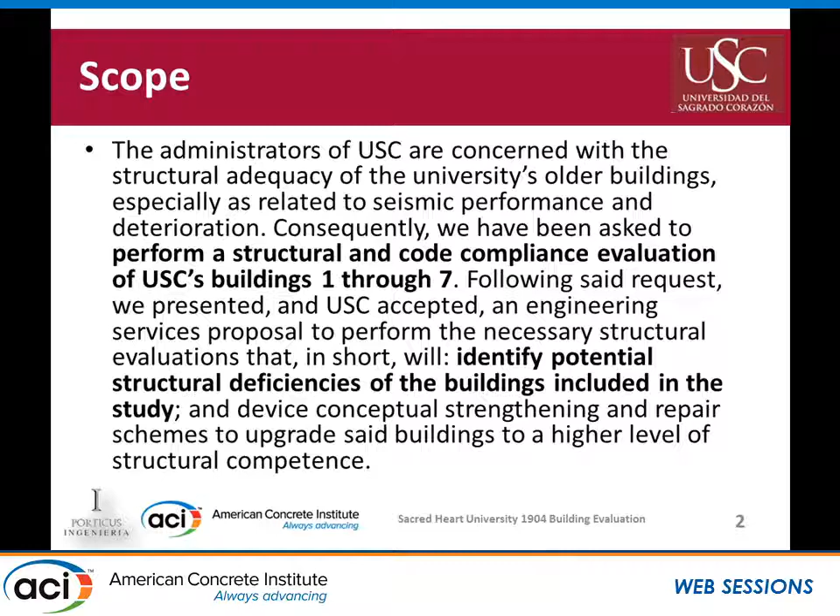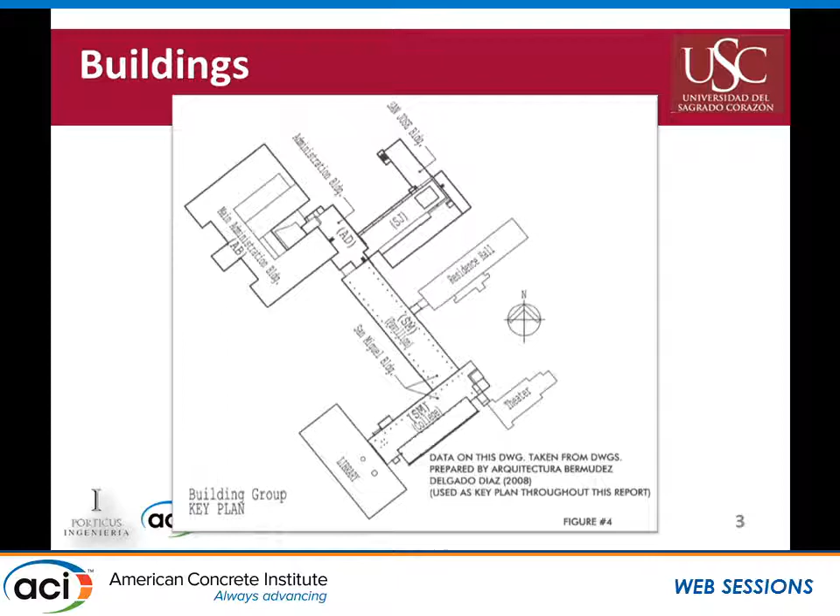Do we have... oh yes, pointer. This is the 1904 building, and it has several expansions. We'll talk about it. But they asked us, since we were going to do this, to do the same kind of study on other buildings, the San Jose building, San Miguel building, the residence hall, etc., which are concrete buildings that were built over the 20th century, attached somehow to the original 1904 building. There are no joints whatsoever between any of the buildings, so you can imagine how difficult things get.

We discussed with them, and they allowed us to do the preliminary evaluation. As you know, you review construction drawings, do visual inspection of the buildings, then some quantitative comparison of codes. As you go back to the old buildings, you'd say, well, it will be more difficult. As you go to the newer buildings, you'll have more information. Wrong answer. The newer buildings, the less information we had.

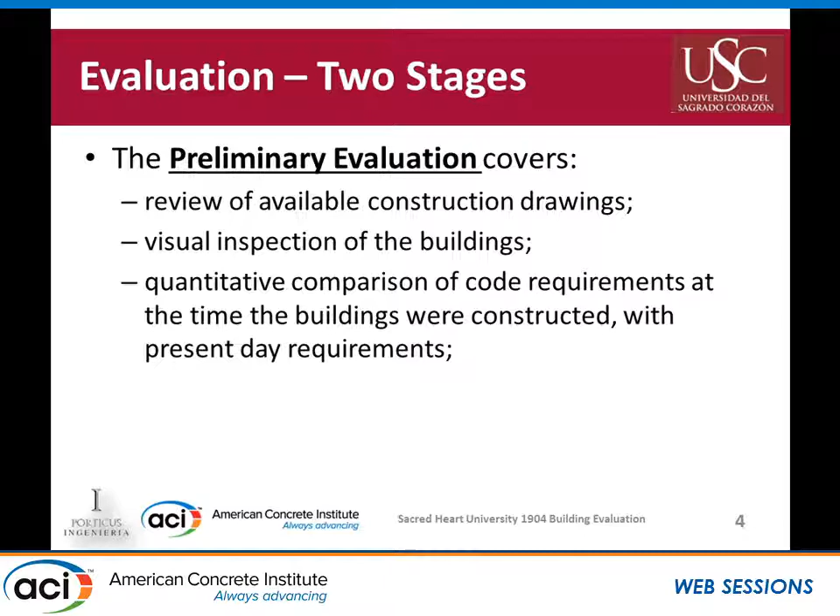We were able to find the construction plans for the 1904 building. Some of the buildings were done in the 70s and 80s, and nobody has an idea where the plans were or what they did. So there was a program for us to do an as-built of the building. We did both the architectural as-built and the structural aspect, because there was no idea what the structural systems were. So it was a tough start.

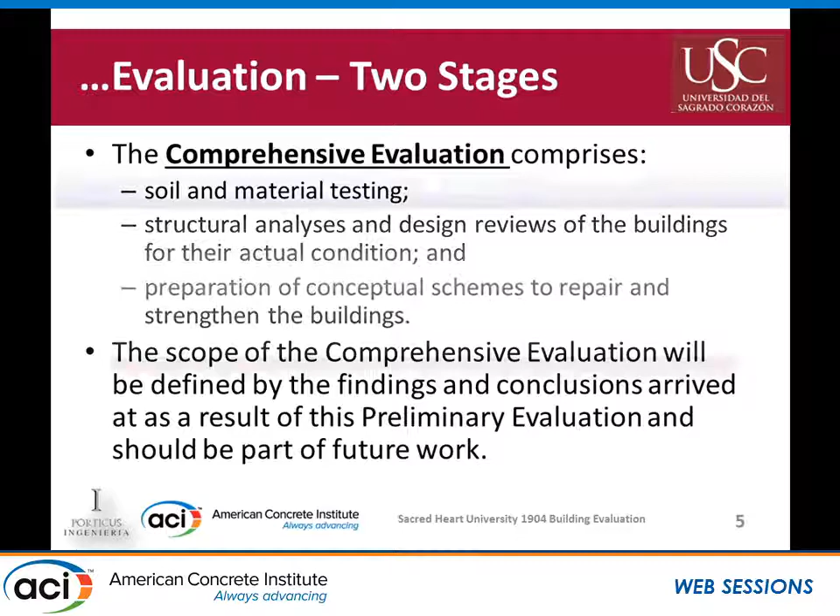Then the comprehensive evaluation, as you know, goes to soil and material testing, some analysis, and the preparation, guided by what we found in the preliminary evaluation. Because there are seven buildings, in terms of what the university thinks there are, 7 buildings, it would be too long for the short 25 minutes I have.

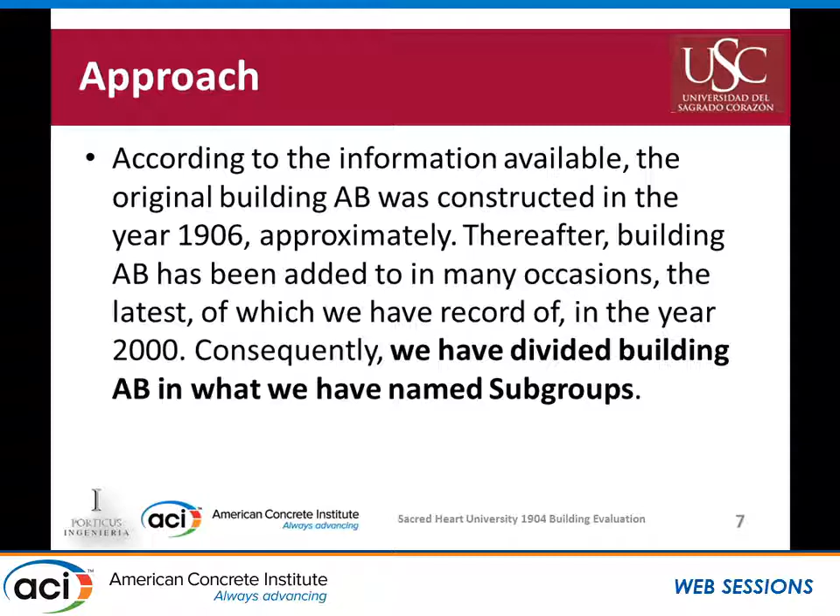So I'll concentrate on the main building, the 1904 — 1906, I'm sorry — that's the presentation. That building has had several additions up to the year 2000, which was the last addition. So in order to perform a Tier 1 or Tier 2 analysis, we had to subdivide the building into what we believe were the construction stages, because for some of them we're not even sure, after several months of studying. So we call them subgroups, and that's how we started the group.

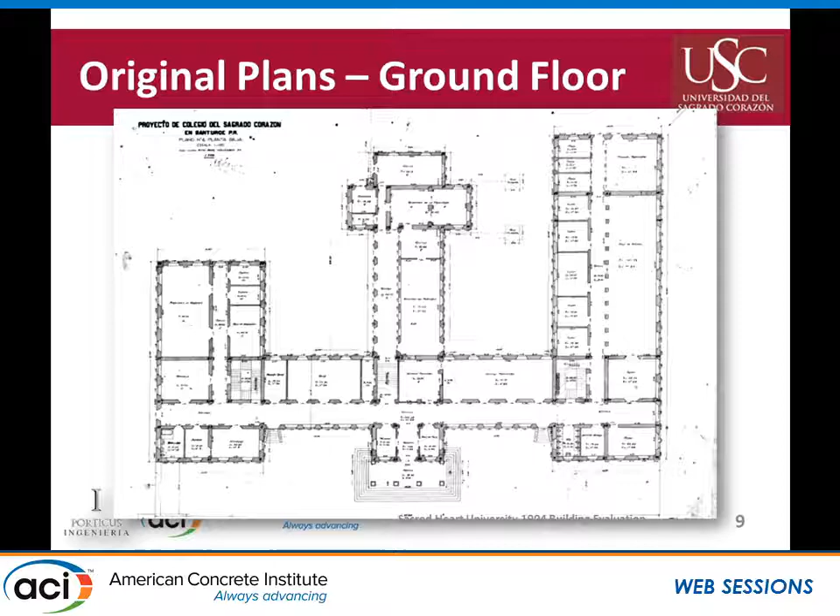They existed in the archives of the university. The original building was built with some concrete columns. There's a chapel—we'll go into that soon enough. The chapel's columns were made out of concrete, but instead of rebar, they have steel shapes inside the columns. The floors were made out of steel beams, but the beams were encased in concrete.

I've seen that in several buildings in Puerto Rico from about 1910 to 1940. They would use steel shapes with forms that created a rigid diaphragm with rebar, but the steel beams would be inside the concrete. I'll show you some pictures later.

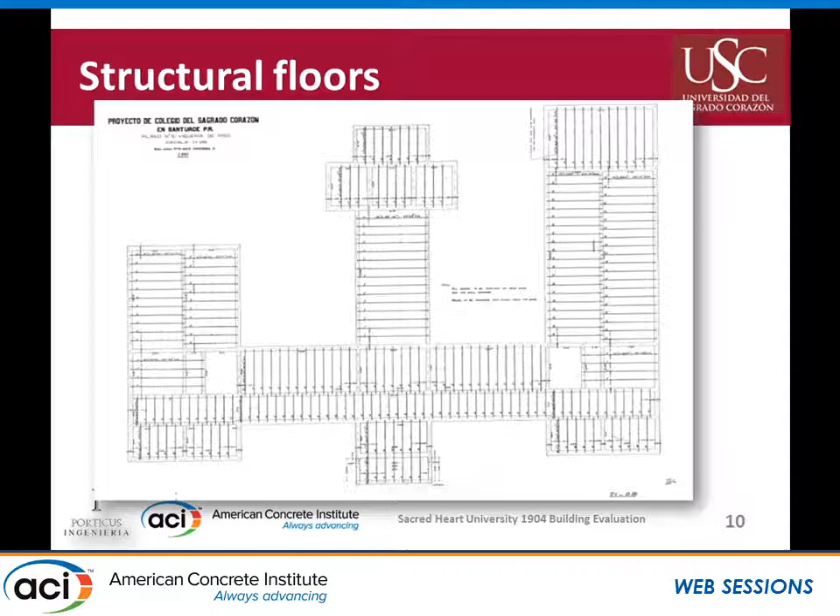It was a very simple design in those terms, but thank God for the original plans—we were able to have information on the original building. So we went into the trouble of trying to identify the phases of construction of the different subgroups.

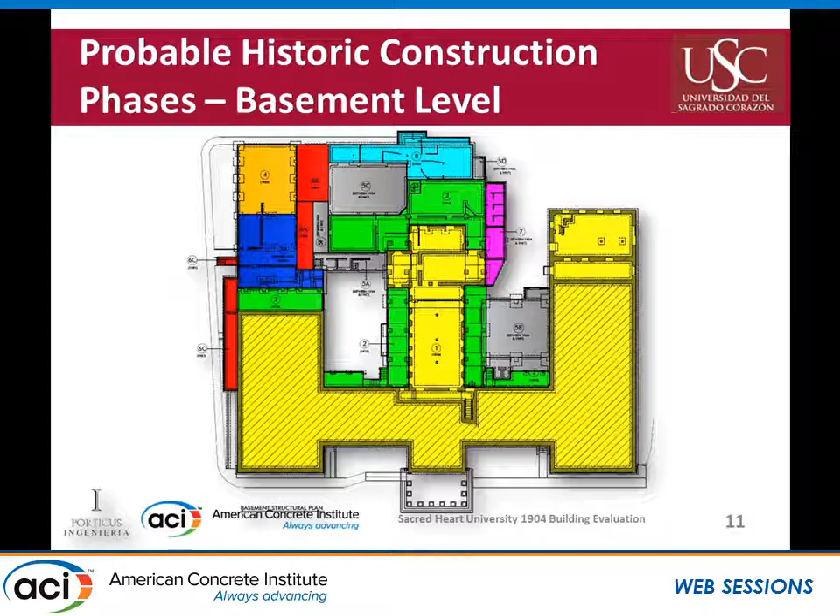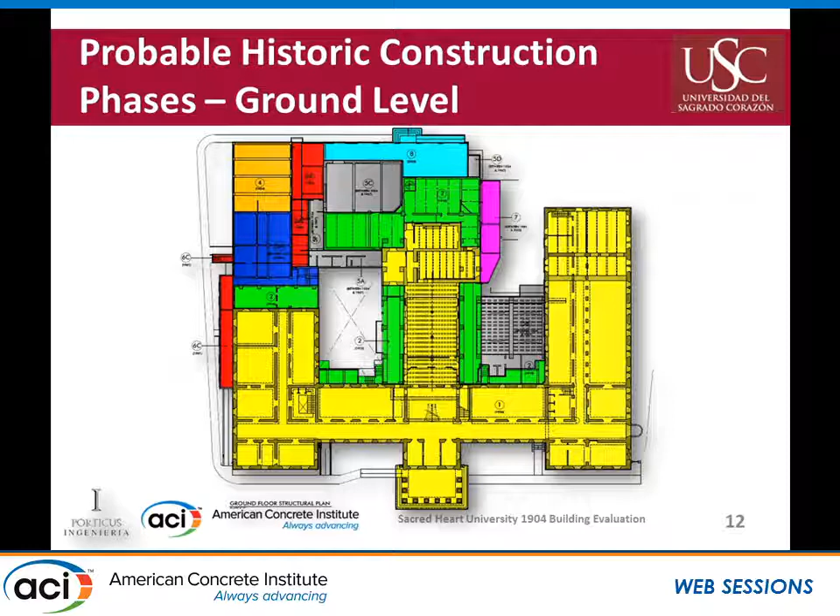As you go up, you can now see the chapel and what was built on top of it, and you can see the different buildings. The green building was the newest one. The areas marked as green are the ones attached to the main building, already reinforced concrete development. Only the area back here marked blue has steel beams and concrete floors.

As you go up, this is empty because this is a beautiful chapel, three levels high, with beautiful shelves. This is an addition, and this is one of the worst parts of the construction.

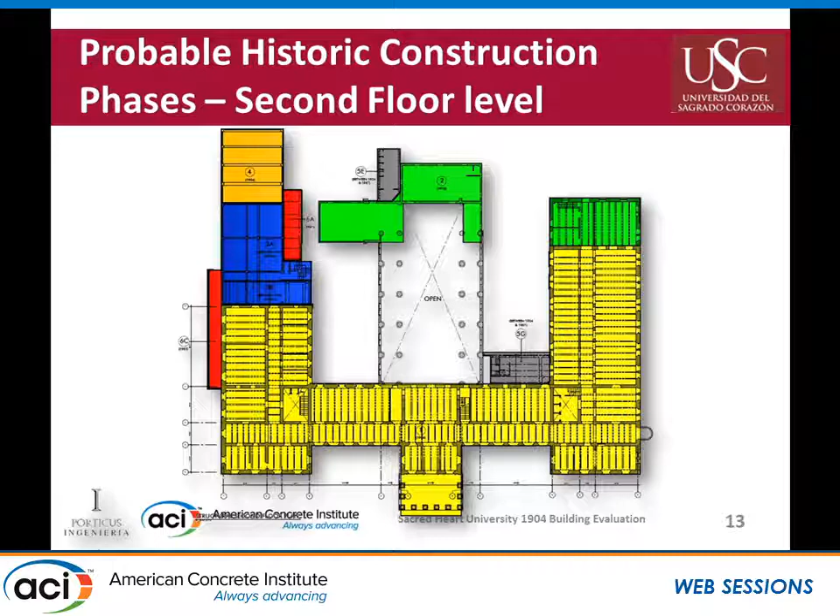This was an addition to improve the area for the priest, to have more room, plus some more rooms in the back and another library in the building. And then this is the roof of the chapel.

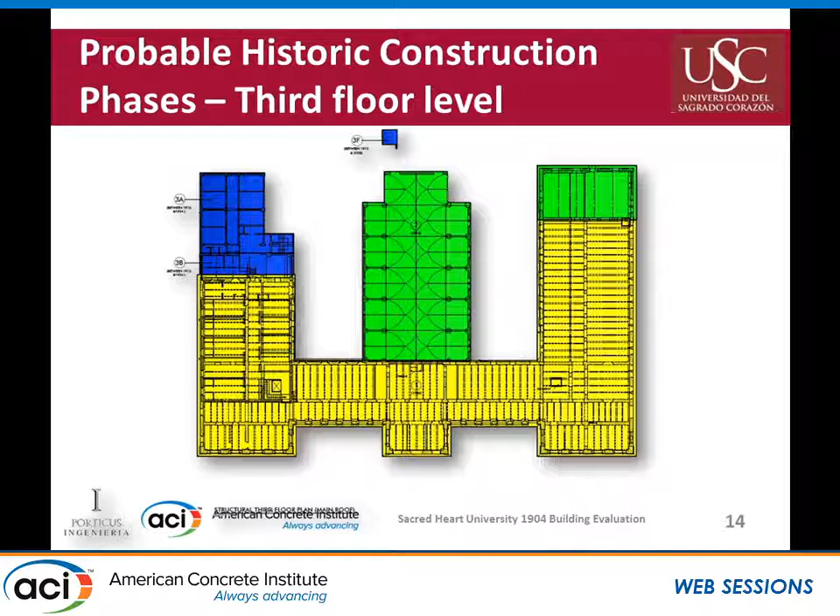Then some more—this was a college run by nuns for the first 60 years, so they built more rooms for more nuns. The same thing happened on the upper floor; what you saw from the front picture were more rooms for the nuns who ran the school.

It used to be a school for girls only until around 1980. Then it became a university. Today it is the Sacred Heart University of Puerto Rico.

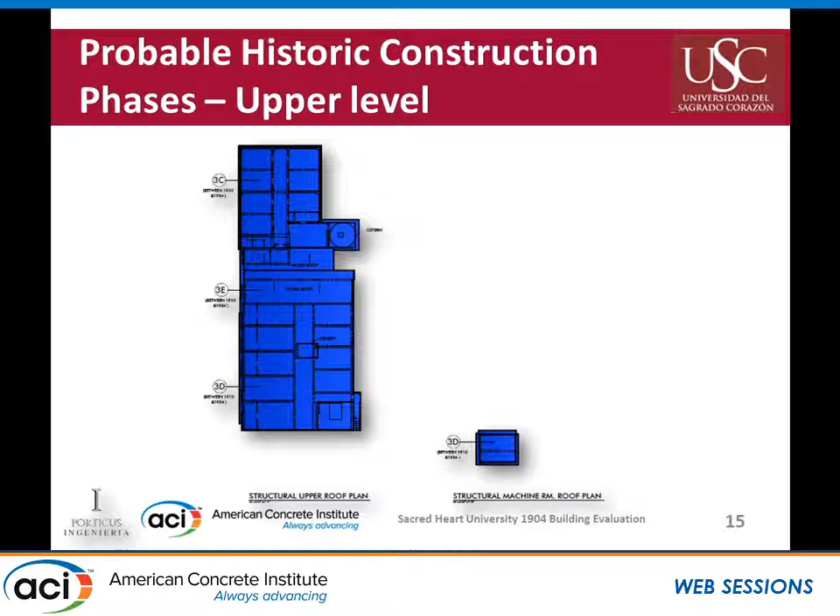This is one of the worst quality construction parts. It was apparently done without any construction plans—they would add some more rooms, and someone got there and just did them.

In terms of the rapid visual screening, as we went through the building, it was very difficult. We lost a lot of money on that first part because it is very hard to deal with the university, the professors, and the employees. This is the administration building, and because of different additions, the floor height is approximately 16 feet, but in many areas acoustical ceilings were installed during the different stages.

So in order to do a structural as-built, you have to coordinate when a room was accessible and when it was not. Because we were interested in the bigger job, we just hung in there looking forward to doing it, and we thought we could finish in two months. It took us six months to complete the structural as-built of the administration building alone, because of the coordination with the professors, etc.

As I always like, the FEMA form gives you a quick and simple way of seeing how bad things are. I know everyone can see every single number is there.

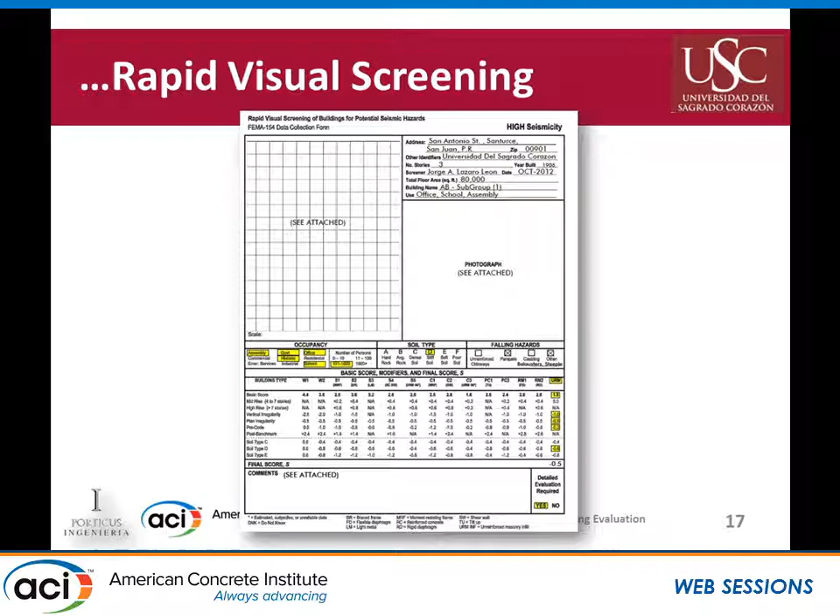This is the unreinforced masonry part. What you do basically is choose what applies or doesn't apply to your building. A basic score for unreinforced masonry is 1.8.

Everything below 2 points requires further studies. If your score by the visual screening is above 2, the building should be okay according to the process. But we started at 1.8, so we're already stuck there. In addition, we have vertical irregularity and plan irregularity.

It is a pre-code building, and we are on a stiff soil area. So our final tally is minus 0.5. It cries and shouts, 'Help me, help me!' That's the process. But things got worse because we thought, well, that's for the masonry building. We'll improve as we go on.

Nothing to do. So this is what we believe was the second construction stage of this complex: alleys to each side of the patio at the lower level of the chapel, additional rooms in the back, and the first lower level building on the lower floor.

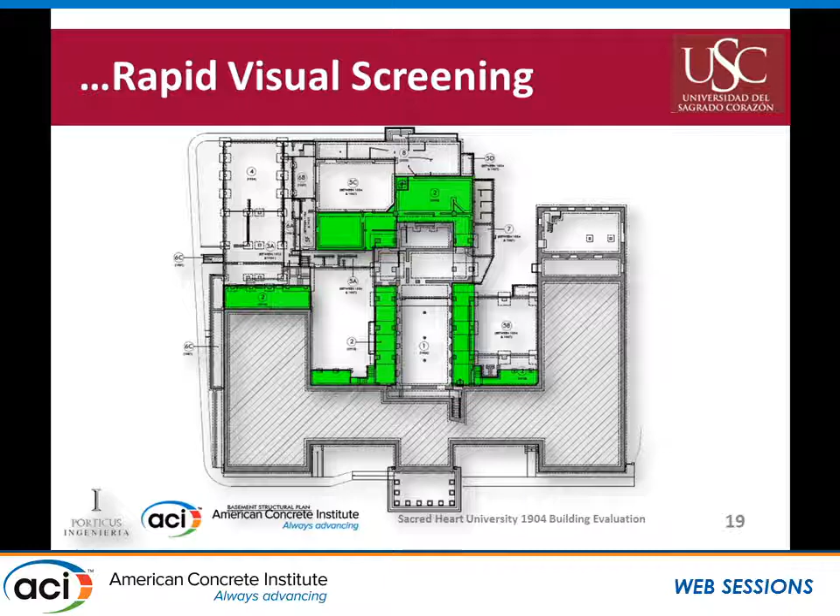But as we go, we did the same thing: minus 0.9, minus 0.3. You see two scores here, because this visual screening doesn't allow or doesn't take into account mixed systems. So we decided to evaluate both systems that the expansion has. That's why we choose reinforced concrete and why we use shear walls.

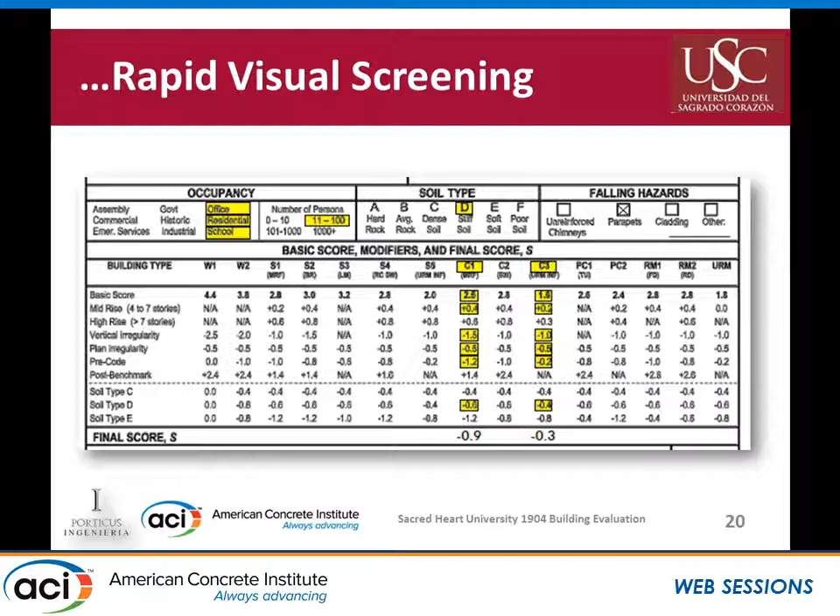As you see, it starts at 2.5, but as we go down there's a lot of negatives because, as you can see just by the plan, the irregularities are tremendous for what they did. So there's a lot of negative points in plan irregularity, vertical irregularity, pre-code, soil type, etc. Even the newer additions made in reinforced concrete both turn out to be on the negative side of the punctuation. So again, it was crying that you need some help.

So this is the process, and I cannot follow it large enough to do. But at the end, what this tells you - I'm not going to follow it due to time - but it's a very simple process. You go, when do you need what, or what do you need? I think it's a great guide.

I know there's some critics about this process that it takes too much out of the engineering judgment. I think that with good engineering judgment, this is a great tool, because lawyers exist. And at the end, some years from now, something is going to happen and I followed a process. I think there's a lot of logic and input. As ACI and ASCE now are working together improving these standards, it will be even much better, as we have gone in Committee 369 reviewing this stuff.

I understand the critics, but the worst thing is doing nothing. Three years ago I was invited to Turkey to give a presentation of U.S. codes and historic structures. It really makes you cry what poor guidance is actually given in all the codes in America in terms of what to do. The historic buildings are there, they are reality, and they are the patrimonial history of our country, and we need to preserve it.

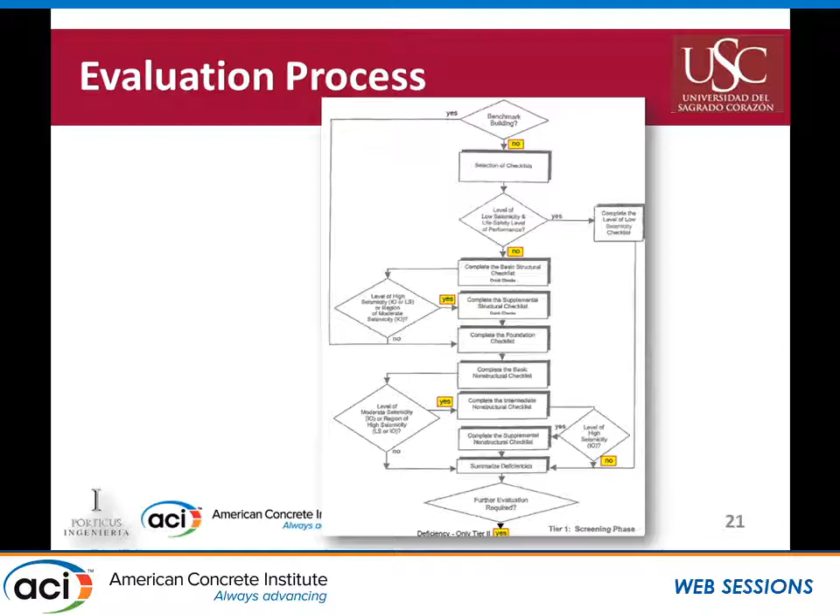So sorry for the guys who are always saying no. I think this is good. There's another federal evaluation requirement that you need to do in order to follow the process, and basically it goes again on whether it's a low, medium, or high seismicity area. In the case of Puerto Rico, it's a high seismic area.

Then this is a very important decision, whether you're talking about the building for just life safety or for immediate occupancy, which is very, very different in terms of the stricter requirements imposed on the structure. Most buildings will only require life safety - you want everyone to walk out after the earthquake strikes. But as you go into schools or hospital facilities, you really need to be in immediate occupancy mode, because they will be required after the damage.

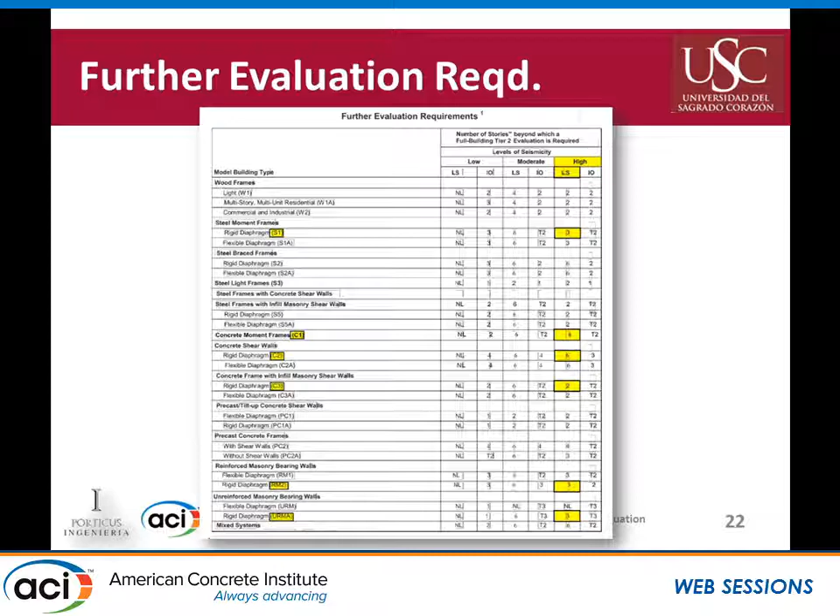So we go through a process. I'm not going through the numbers, but it's just a simple way of, depending what you have, you choose what the values are for your particular building. Then you try to see if there's some other deficiencies, in ASCE 31, the Tier 1 analysis, you determine depending on what is your system.

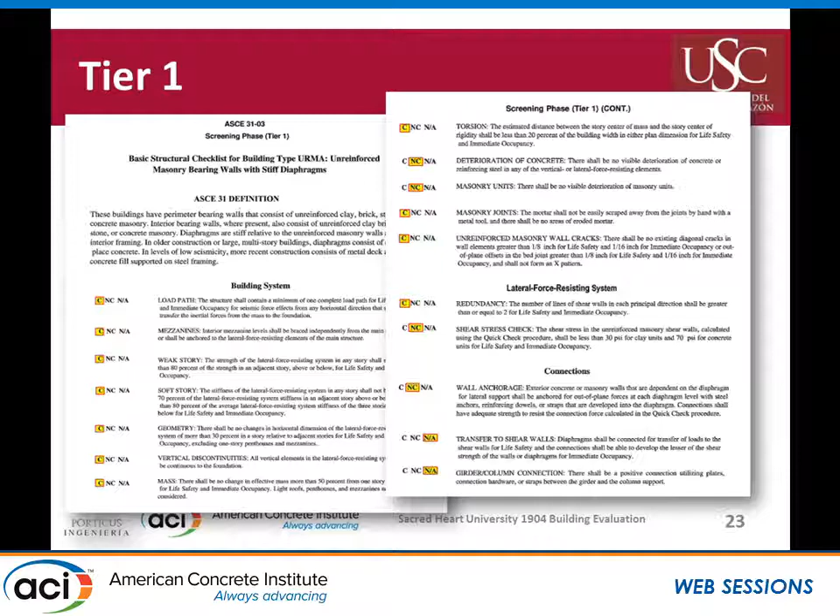Again, we're talking now about the 1904 building, and if it complies or not. There's a list, and you check whether it complies, doesn't comply, or whether that option is not applicable. There's a long list of things in terms of the building systems, the lateral force, the connections, etc. Then there are some supplemental structural checklists, because the building has so many deficiencies, you have to go to the next level and keep on looking for more deficiencies.

At the end, we found over 200 deficiencies in the building, according to the program. So although from this rapid visual screening you could determine that - just in case - remember, you have to convince an owner that there's a lot of money that has to be put into the building. In my opinion, I'm the one that sells the projects to the owners in my company. This is very important, because it's not just, well, we did a rapid visual screening and found your building is deficient and we need to do more studies and you need to pay me more.

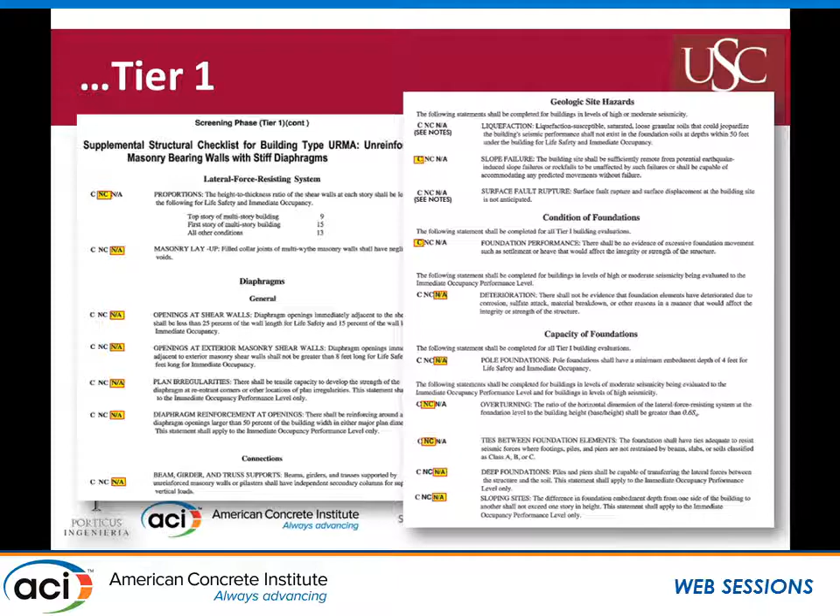But when you go with this checklist, say we went through the checklist that ASCE and FEMA have, and you find 200 deficiencies. Oh, that stuff's... that's a reality of life.

Just to show you some stuff, this is part of the rebar that got spalling, etc. But this is one of the craziest and worst parts we found all around the building. Every time a new air conditioner was installed or whatever, they did whatever they wanted. Nobody cared whatsoever in the maintenance division of the university. And they suck. There were even portions where there's already a hole here, but they make a new one next to it. Oh, there it is, you see?

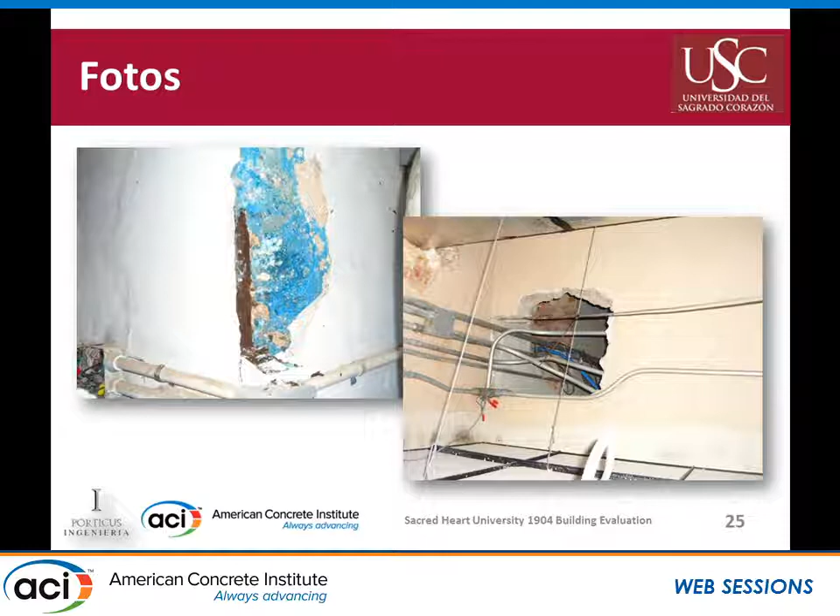So we thought architects were worse. No, the truth is that for structural engineers, mechanical engineers are the worst.

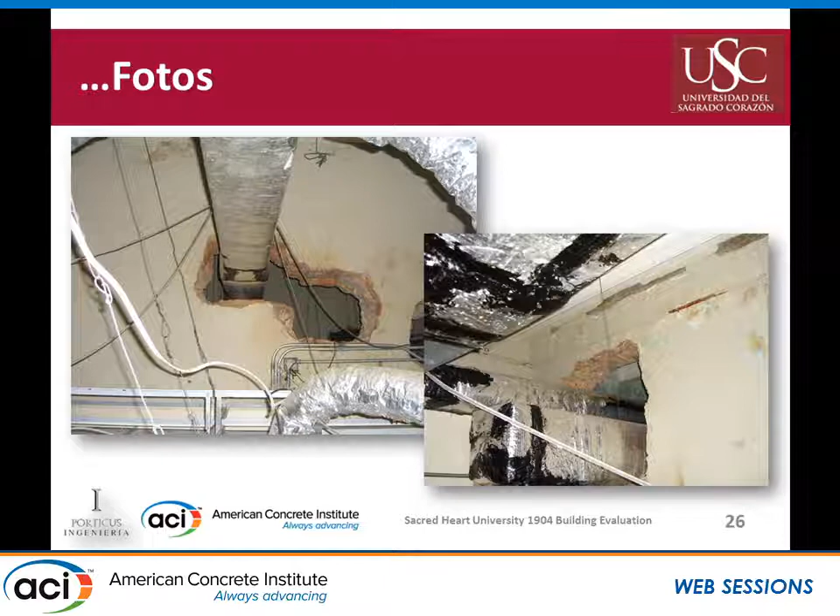So you see here, these are openings on the masonry walls. As a matter of fact, we just finished repairing one of the portions. We made some wood frames and repaired the masonry, etc., to give it more integrity. But it really is really sad.

And what this produced is cracks on the original arches, because of all this mutilation that happened in the building. Then there were some areas where they have high rib with plaster, with gypsum plaster and stuff, and some of them have cement plaster.

And there was a leakage at some time. It fell down. They corrected the leakage, but then they put an acoustical ceiling because it looked too bad. But they left it like it was, and a proper repair was never done.

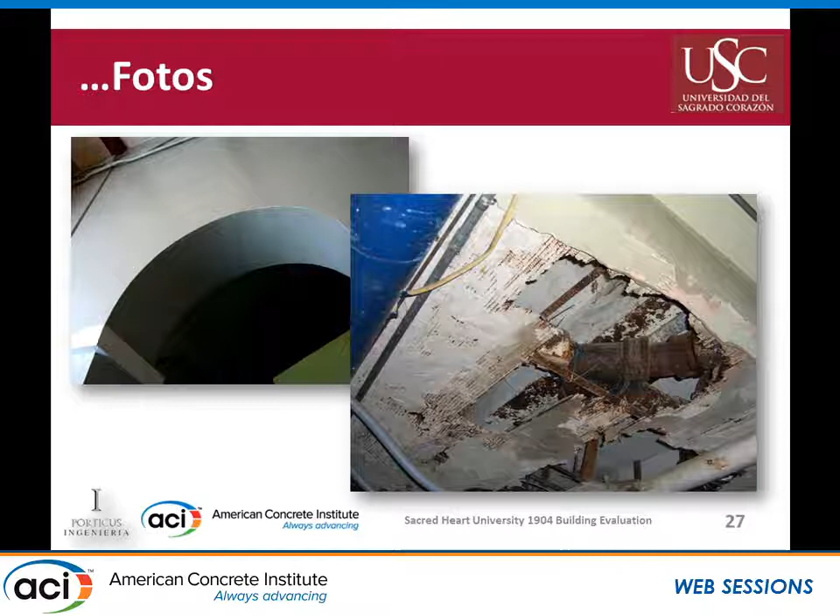More bar corrosion. Oh, this looks better on my screen than your screen.

See, this was the column that initiated the issue of calling us to see the building. They were terrified. And as you'd expect, there's not too many cross ties - actually no cross ties, just some stirrups and some of the bars there.

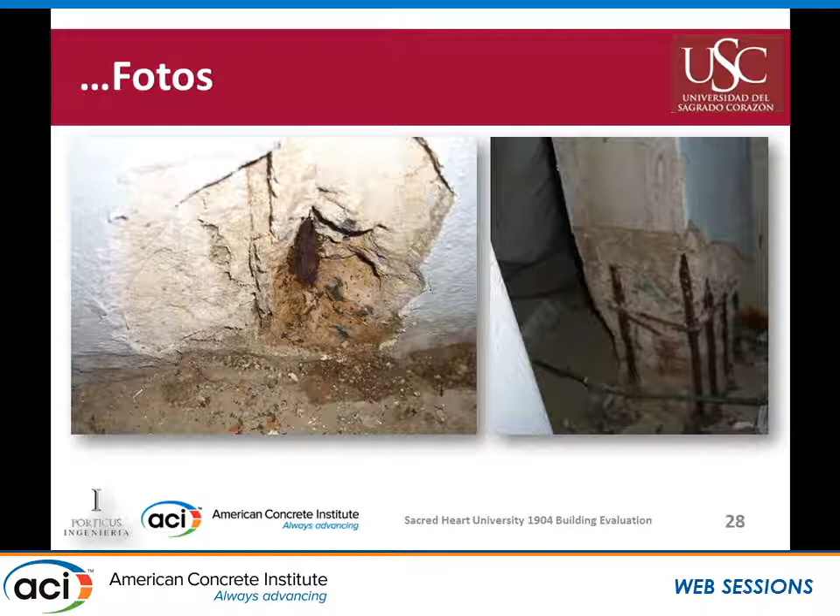And we found pre-deformed bars, twisted bars, the whole collection.

And you see here, this is the steel beams encasing concrete. At some point they poured concrete from the flanges up, but the bottom part they put Hy-Rib with cement plaster.

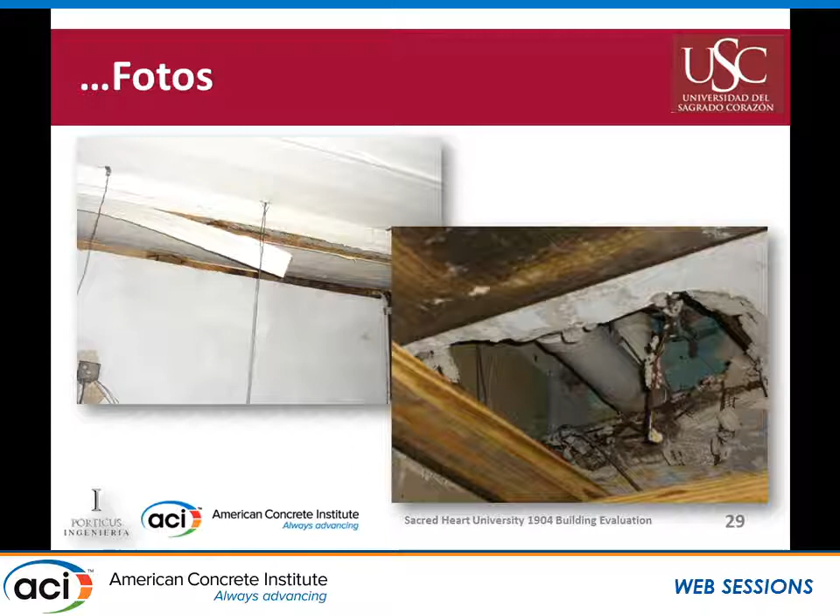Again, when corrosion started in some of the areas, that Hy-Rib started falling down. Again, they just put some duct tape and then put an acoustical ceiling, and that was how it was resolved.

Then there's some areas - this is where the TV station was. It's a modern construction, quote unquote, of the 70s. It sucks. The way the impermeabilization was done was very bad.

They had some problems with the air conditioning that created a lot of humidity in the plenum, and because of that, basically all the structural steel that was installed for the slab is fully corroded.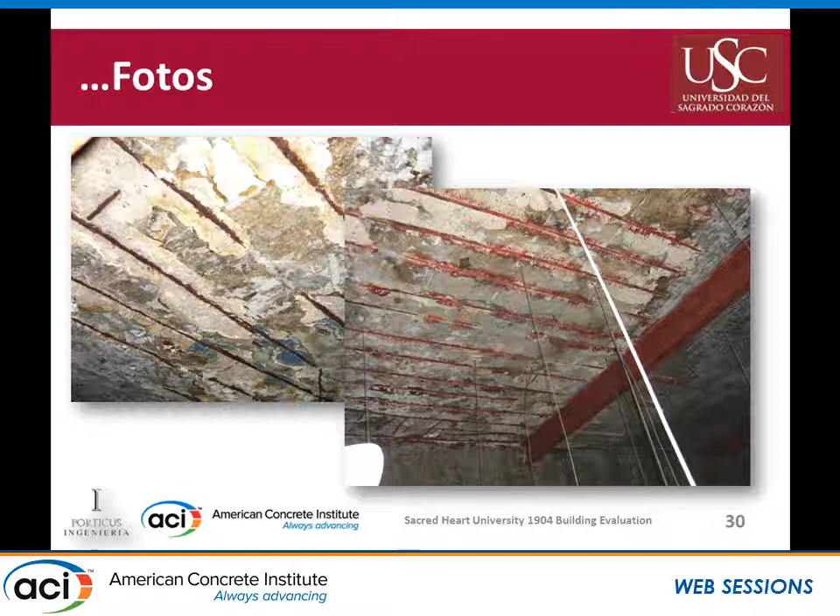This is the point where you don't repair or make any tier 2 analysis or recommend any kind of analysis. The best advice to your client is that this portion is cheaper just to destroy and redo. Don't lose your time on that, just go ahead. It may be sensitive for some industries and hospitals, where you may need extreme repair, but for a school, just move the students elsewhere, redo it, and forget about it.

And so you see here, this is a twisted bar. I don't know if the younger crowd here has ever seen a twisted bar. It used to be square bars that were twisted to create the bond.

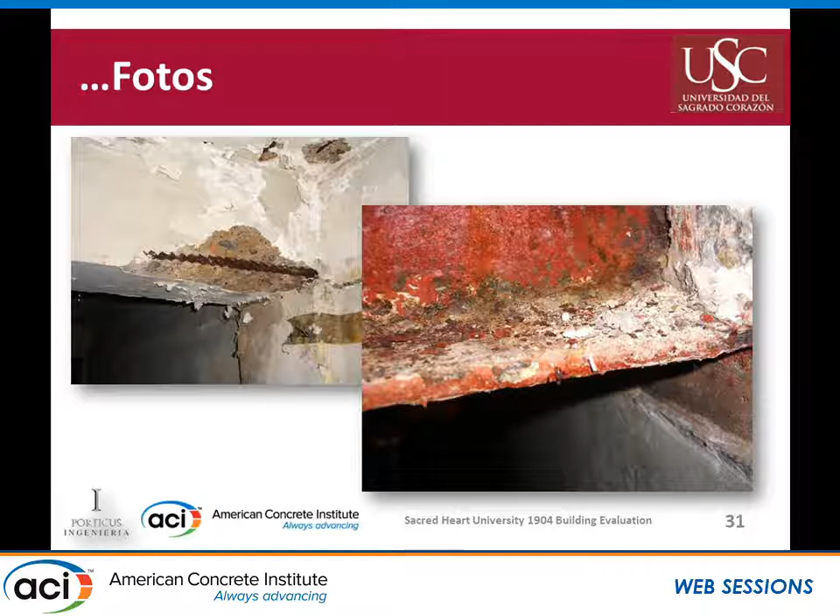This is corrosion on the beams, on modern expansions. You see the cracks again, from corrosion all around the building. Some more columns with spalling everywhere.

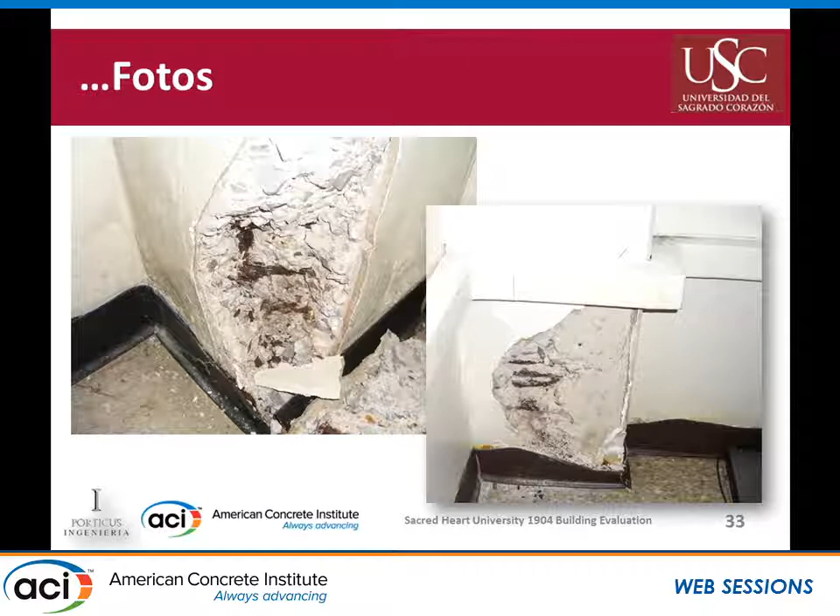And then this is - remember the green portion I showed you was the second expansion. So on the left side, there were additional rooms added, etc.

My conclusion after we did some tests is that the expansion was built with sand from the sea. They didn't use the ready-mix producer. They used sand from the sea, because the level of corrosion and the level of chloride content in the matrix is unbelievable. And again, this is a sad part.

You can see here, this is the architectural decoration of the old facade, and they left it there and built the next rooms around it. So for this portion, again, our recommendation is to tear it down, and in my opinion, not build it back.

And even in the nuns' room area, our recommendation is to tear it down. No nuns live there anymore, so why repair it? They cannot get classes or use their rooms. These are nun rooms, about 8 feet by 10 feet or something like that. So it really makes the original building uglier. Why go to the trouble of repairing those portions?

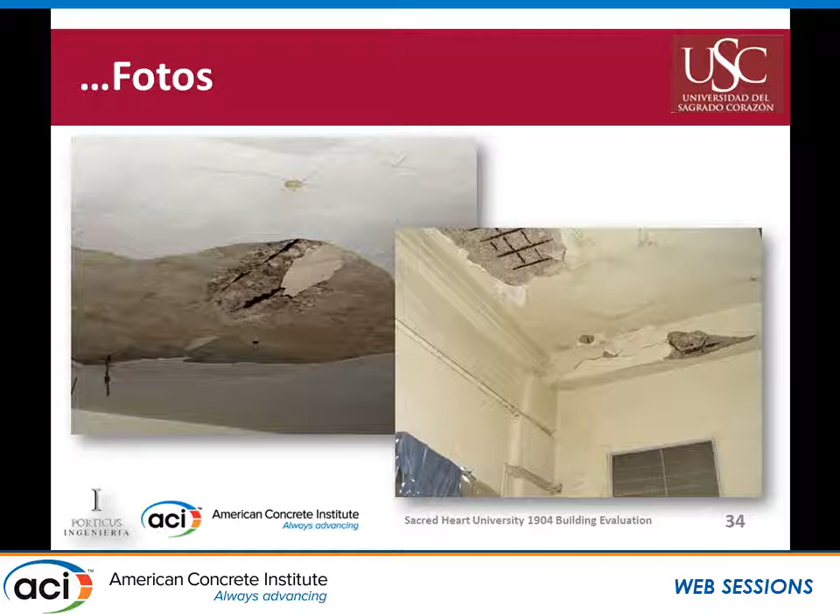So like in this addition, our recommendation, and we have the owner almost convinced that they will tear that down, and we'll cross our fingers that they will.

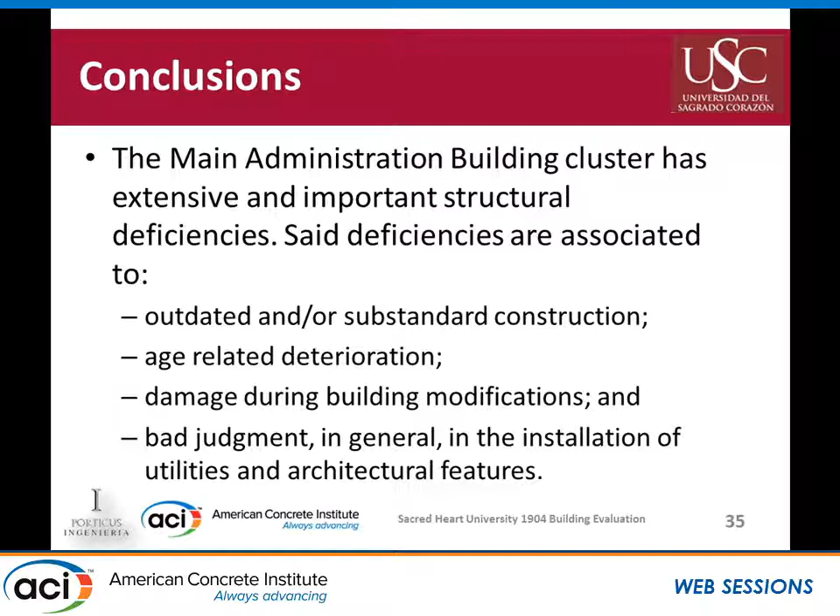In terms of the main administration building: outdated, substandard construction, age-related deterioration, damage during building modification as we mentioned before, and in general very bad judgment from the administration of the university. It's a beautiful campus, a very large campus, and yet instead of preserving this beautiful building, they keep adding stuff.

In terms of code comparison, the evaluation concluded, as you expected, an inherent very high seismic vulnerability. We estimated a vulnerability factor of 3, which is quite large. The RVS screening, the rapid visual screening, showed that it would require further evaluation.

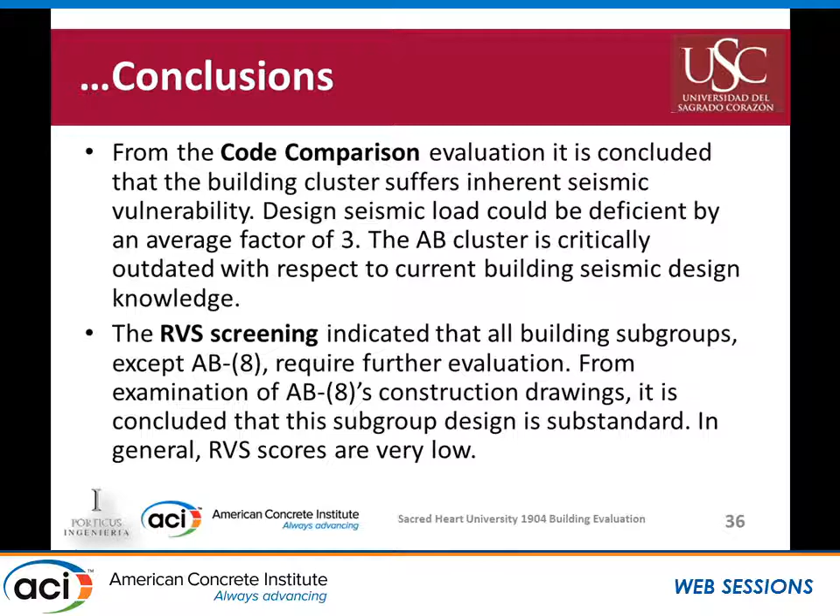From the evaluation of construction drawings where they were available, everything is substandard. So all the scores of all the additions came in negative, which is outstanding. How bad can things be done?

And let me tell you, although I'm not talking about the other buildings, the more modern buildings like the San Miguel building and the San Jose building, which are modern from the 70s, they don't comply at all. Negative results, very poor judgment on the structural systems - strong in one direction, very poor in the other direction, and stuff like that.

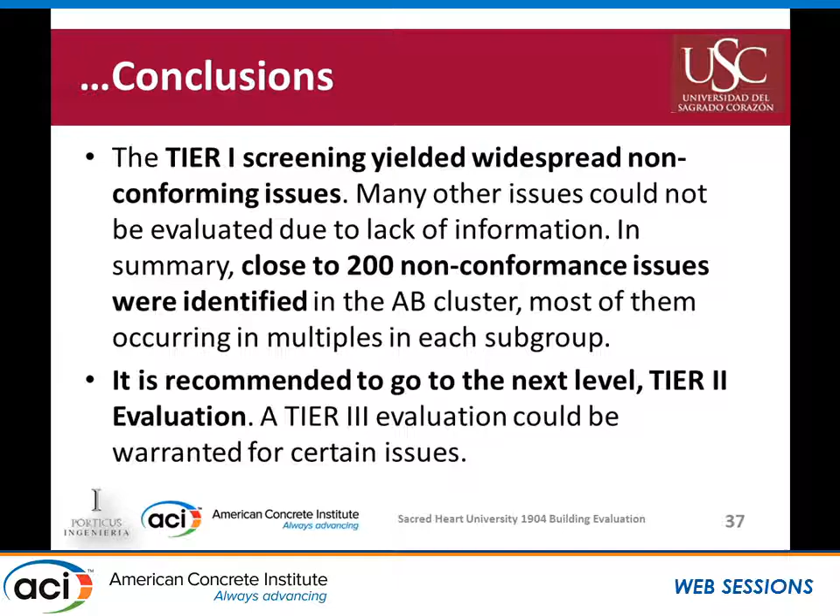So on this Tier 1 analysis, close to 200 non-conforming issues were found, so we recommended that Tier 2 started. For doing that...

The estimate, as it was approved and is now in process, costs $600,000 to do the necessary testing for the building complex.

There was, in a previous part of this forum, a big discussion about the number of tests for each area, whether we do 3 or 6. I strongly encourage that whatever type of concrete you're testing, you should have a minimum of 3, and not go per floor.

I think that's completely misleading. If you're checking the slab, do three tests on the slab. Checking the columns, 3 tests on the columns. Checking the beams, 3 tests on the beams. Just to have redundancy, because in modern construction you find very large inconsistencies in results for concrete tests.

And when you go back to times when there wasn't much inspection and not many certified engineers, it goes even worse. So this is a very important concept - what is called incremental seismic rehabilitation.

It will be of no service to the owner if we just tell them to close everything down and tear this building down for 2 years. They need the building. So it's very important to sit down, and we did, with the planning department on expansions, etc., so that we could coordinate.

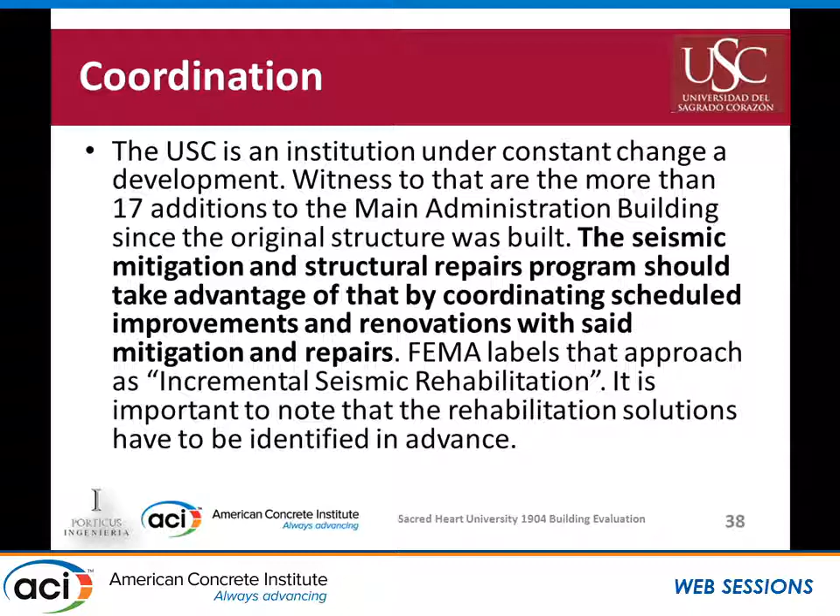As a matter of fact, when we were doing the rapid visual screening, there were some new labs being developed in one of the other buildings. So they asked us if we could do some strengthening in that project, although we hadn't finished our job. We modified the construction plans for the architect doing the labs, so that at least that portion has been strengthened already.

Finally, because of the deficiencies, we need the other parts - 2.8 is the factor. We need to repair those too.

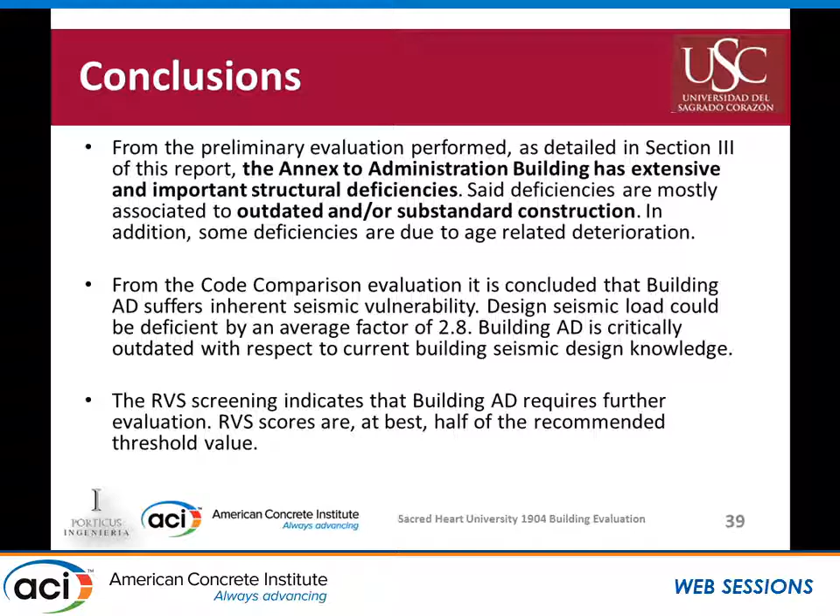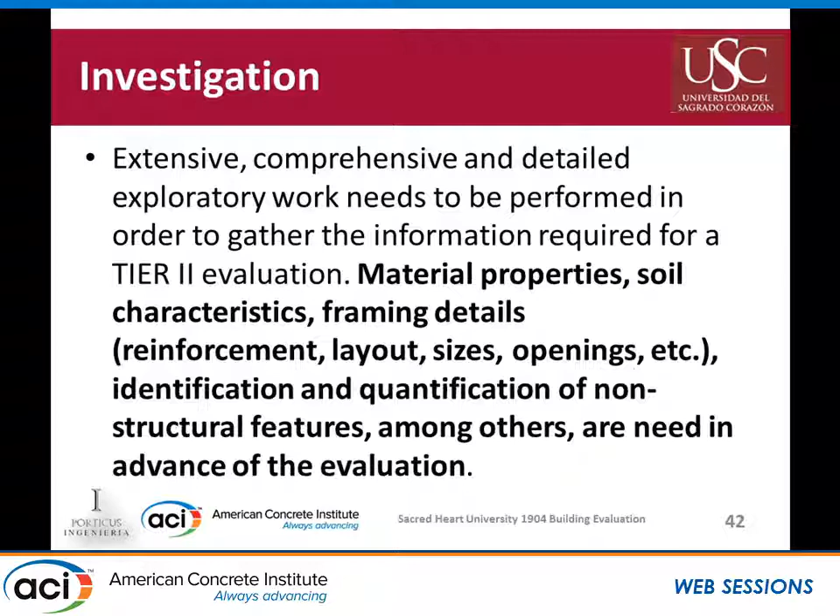So the general next steps are the material testing, which we are on the way with right now. I think it's very important for the owner that you use your engineering judgment and make a chess game of deciding which repair should go first, because nobody has an infinite pocket.

They have a limited budget. They have to budget every year. You will help the owner a lot by saying, let's do this in 5 years, or depending on the impact, let's do this in 10 years, do it in stages. So you will be a lot of help.

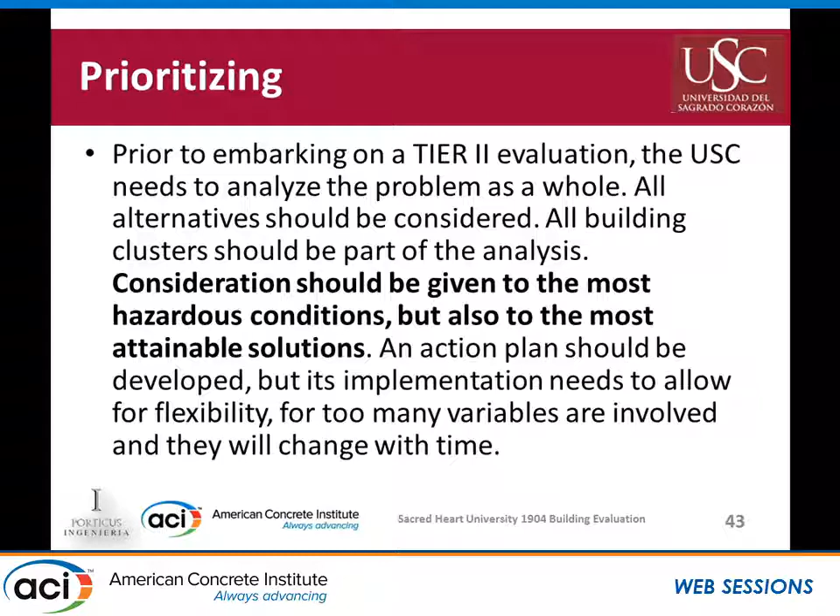You have to understand that the owners are terrified by what you're telling them - that the building is in poor condition - and you need to help them determine how to use the budget, how to use the process.

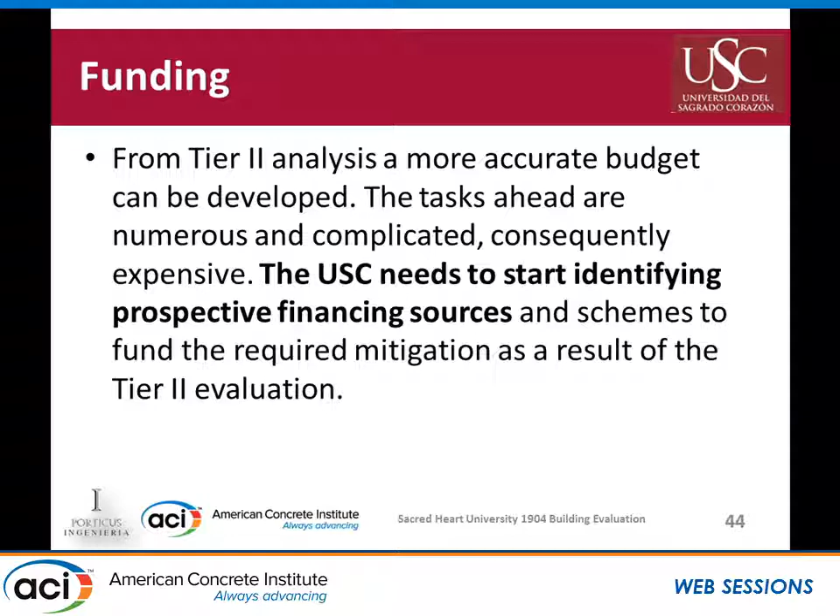And so we are in the process, because of the portion from 1904, the building qualifies for some federal funds, so that's already in process. That will help supplement the funds the university has for doing the restoration.

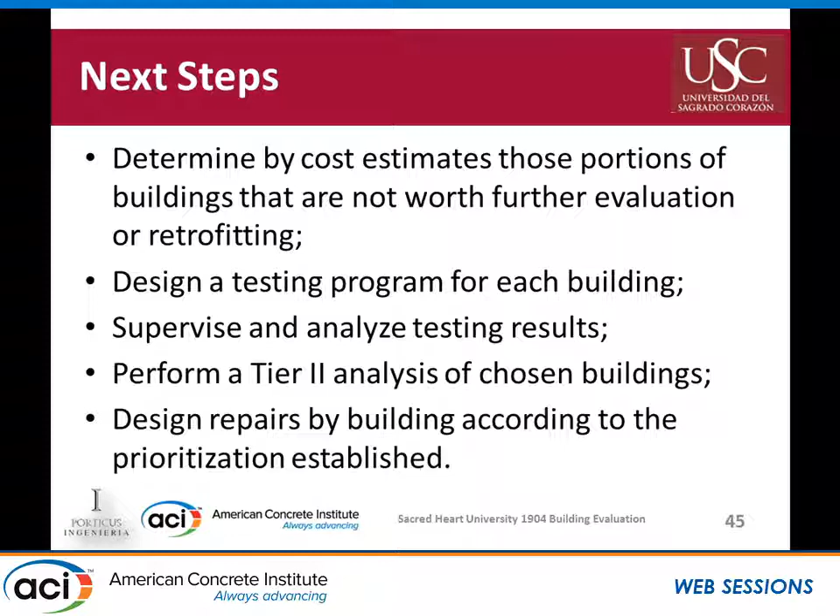So on the other buildings, we will be doing the testing following, once we're done with the administration building, and then we'll prioritize the repairs that will be done. So that's it.